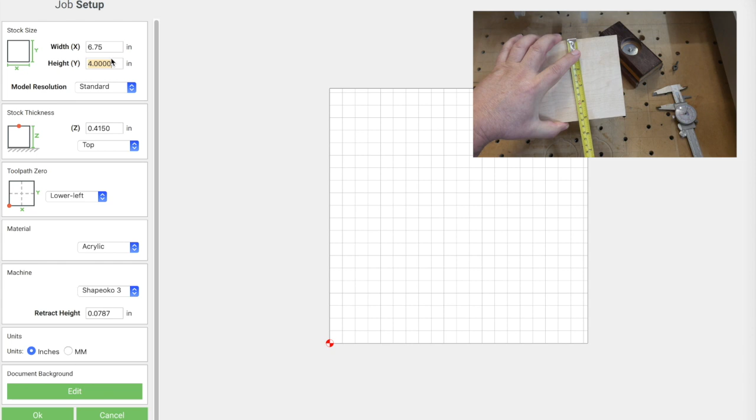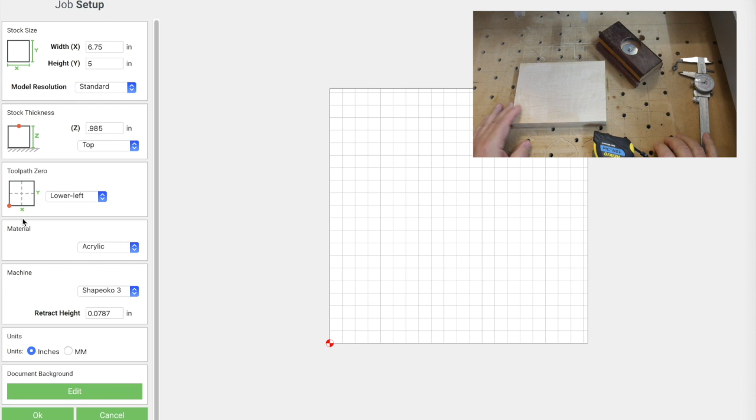Okay, so the first thing we're going to want to do is get a measurement on our stock. That's the first thing we do when we set up any file in Carbide Create. We've got a length of about 6 3/4 and a width of about 5 inches. And when it comes to measuring the thickness of the wood, I always use a set of dial calipers, just so much better for accuracy. And the dial calipers say 0.985. So that's what we're going to set the thickness of our lumber at, and we're going to start our positioning from this bottom left corner. So once we've got all that set up, we can move on to designing.

Okay, and starting with our design, let's take a look at this again. We're going to do the bottom piece first. And we've got here two rectangles, the one going around the outside and then another one going on the inside that will create these two rails for us.

Now, we've decided that our outside is going to be 2 by 3 inches. And I got this by trying a couple of test blocks and just sort of seeing how things felt in my hands. But that gives me a really good size for this. So our outside will be a rectangle 2 inches by 3 inches.

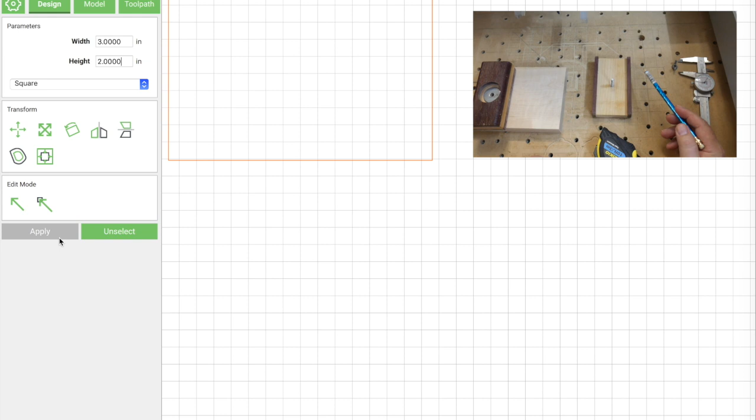Now for this inside piece, I want each one of these rails to be about 1/4 inch thick, right? So to do that, 1/4 inch, that's a 1/2 inch total. I'm going to make this inside piece 1.5 by 3.

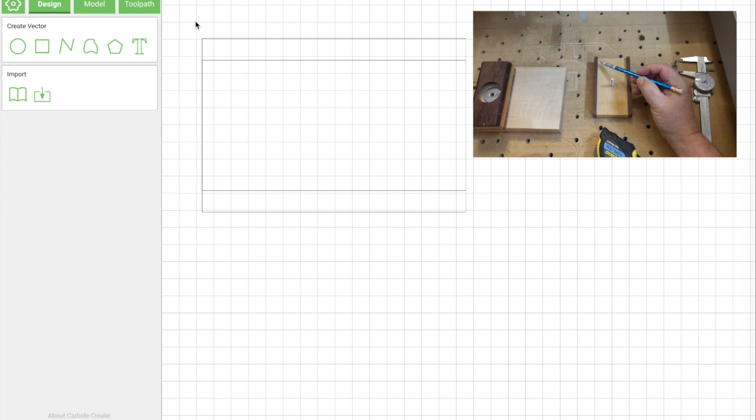Now, I'm actually going to go ahead and extend that a bit, because otherwise when the bit gets into this corner here doing the pocket, it's going to curve in and we're going to end up with like a little nubbin here. So I'm going to extend that out a little further so that the bit cuts completely at a nice parallel angle here and we don't have to carve anything extra out. So I'm going to extend this out on both sides, and that way our bit will cut completely. And that will be for our pocket pass.

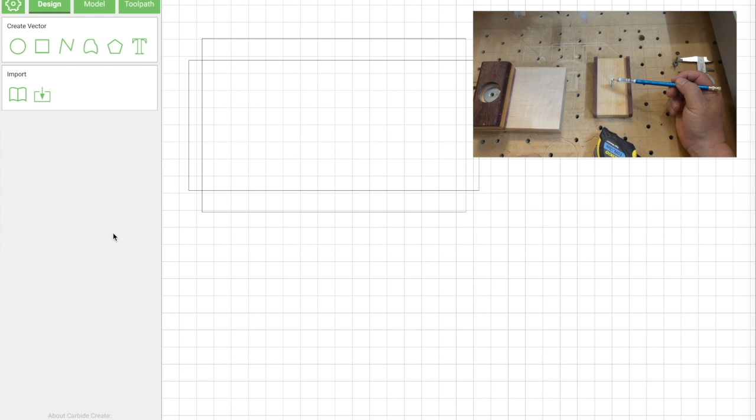Now the last thing we need to cut is a hole for this guy. And I'm going to be using a 1/4 inch bit, and I'm going to make this hole a little bit larger than 1/4 inch. That way we can use the 1/4 inch bit and the system won't complain about it. If you try and cut exactly a 1/4 inch hole with a 1/4 inch bit, it will not let you. It assumes that that is too small, so you need to make it just slightly bigger in order to drill a hole straight down that's approximately 1/4 inch.

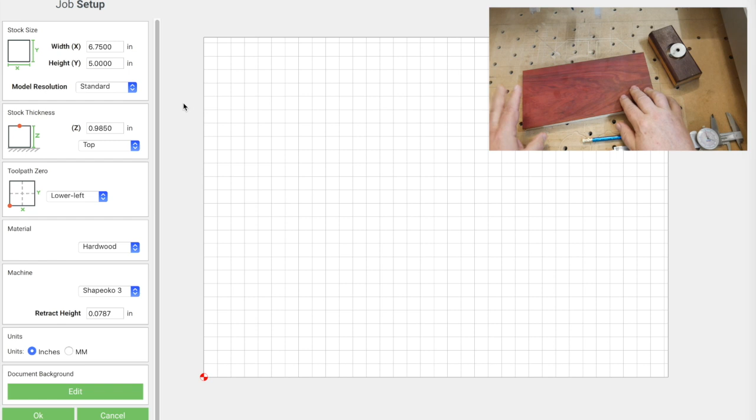Okay, now the same way we did for our bottom board, this is our top board that I've made a composite out of maple and bloodwood that we're going to use to create our top piece like this. So I need to get measurements for this, and we'll set up our file in Carbide Create. And this one is 10 inches by about 4 3/4. And again, use the dial calipers for thickness. Okay, that looks like 0.68.

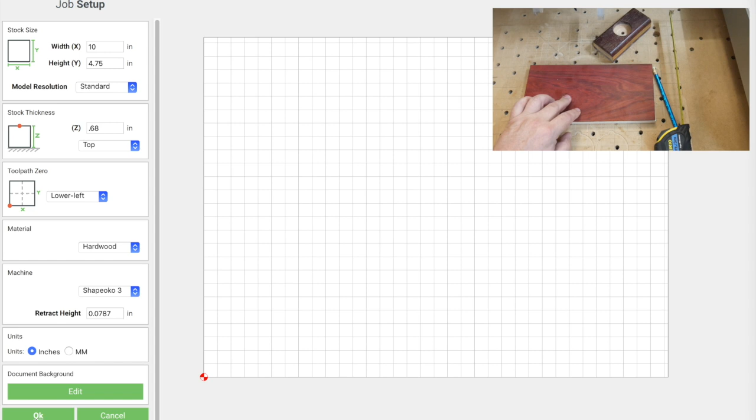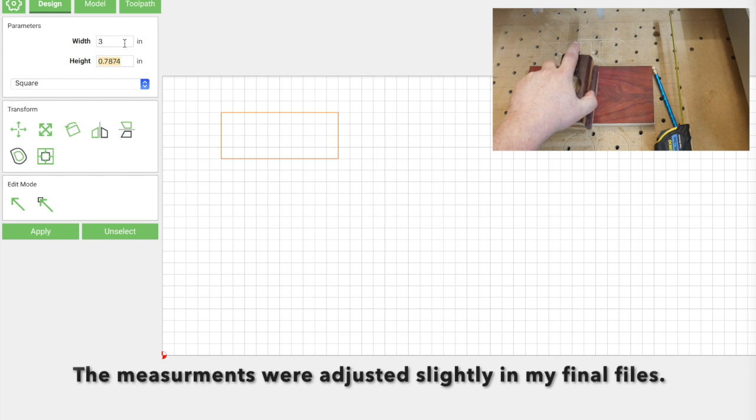Okay, so now that we've got our sizing on this piece and we've set everything up in Carbide Create, we need to create the shapes that we need for this top piece. Now we have a rectangle going around the side, and we know that that rectangle needs to fit into our bottom piece. So I'm going to make that rectangle roughly the same size, but it's going to be a little bit narrower along this length, so that piece will sit down inside and the sandpaper will then wrap around and have a place to go underneath that. So that'll be just a hair narrower than that.

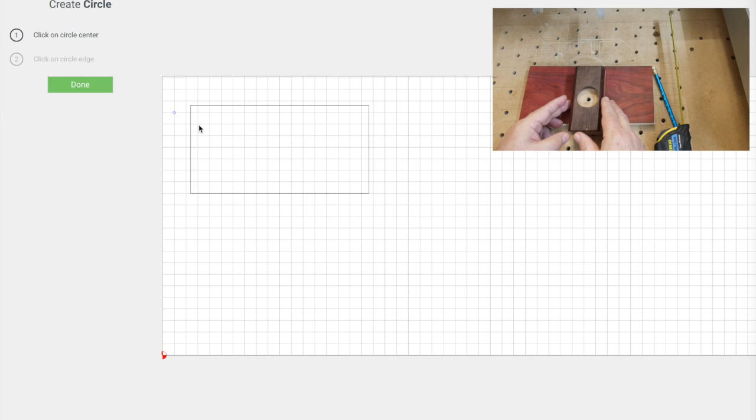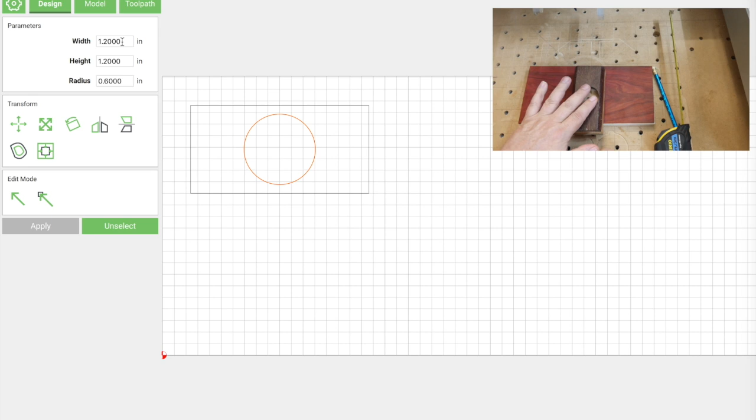So now that I've got this rectangle piece, I need to create myself a pocket here. This pocket is what allows the wing nut to sit down in there and not hit your hand when you're using the sanding block. So we create that circle here, and one thing to note on the depth for this, I go ahead and just measure the wing nut itself, and the wing nut itself is about a 1/2 inch, so I know that this pocket needs to go down a 1/2 inch in order for that wing nut to clear and not hurt your hand.

So the last thing that has to be done is we cut a hole here in the center, and that's where our bolt is going to come up in the middle. And those two pieces have to line up, which is easily done just by centering everything on the rectangles.

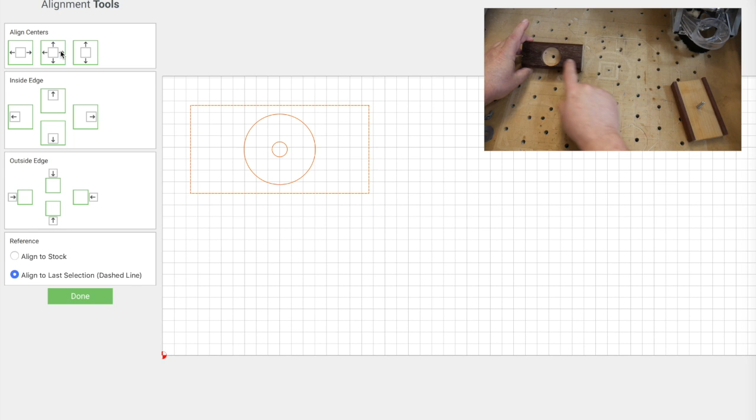Okay, so now that we've got our basic design down and everything is lined up on this rectangle, so we know everything's going to be centered up and it fits really nicely on this piece, I'm going to go ahead and duplicate this 4 times, and that'll make sure that it goes with our grain the way we want it to.

Now, the next thing I need to do is I'm going to put the text on the block, and that will come in right across here. I want to go ahead and put it sideways here on the block. So I'm going to make the text, and then I'm going to turn it 90 degrees so that it fits on my block right here.

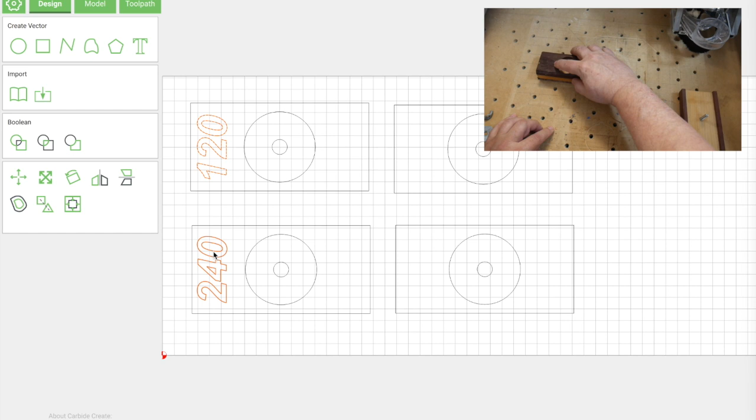So the first one we want to set up is our V-carve for the numbers, right? We're going to use a standard 90-degree bit and just go with the standard V-carve settings. We don't need to change any of that.

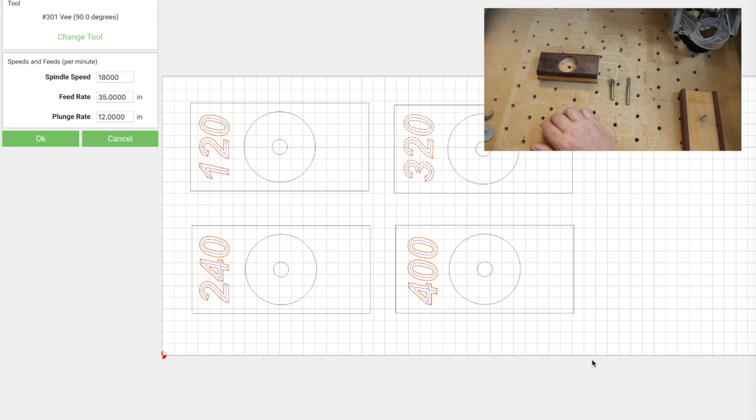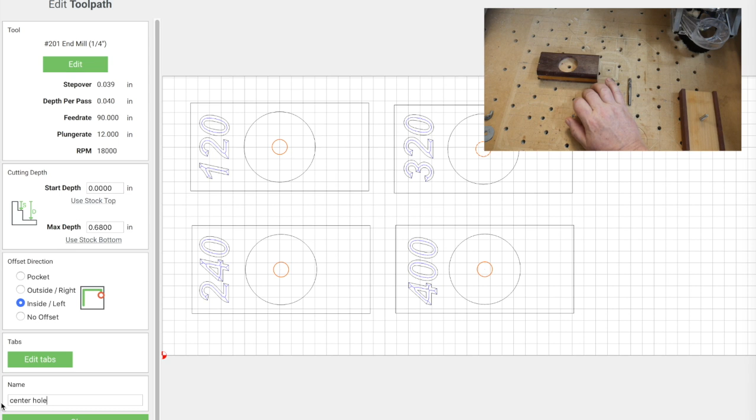And then we're going to use our 1/4 inch bit to cut the rest of this. The first thing I'm going to do is set the hole for our center. And once I've done that, I'm going to go ahead and create a new toolpath group. This just makes it much easier to switch things on and off when you're trying to save the G code, and you'll see that in just a minute.

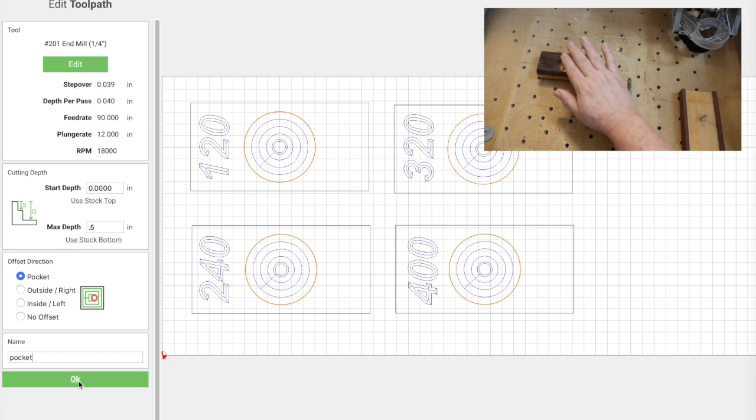So I'm going to call this one 1/4 inch bit, and I'm going to drag that toolpath that we created for our hole down into that group. So next we're going to go ahead and do the pocket here for our wing nut. And if you remember, our wing nut was about 1/4 inch, so we want to make this at least 1/4 inch deep so that it doesn't hit our hands when we're putting our hand down on the block.

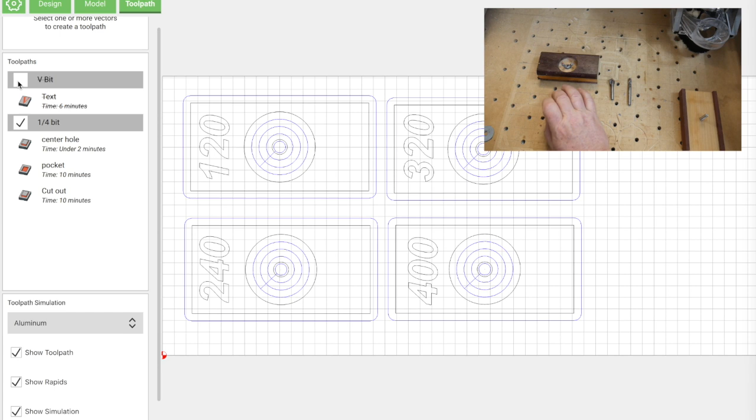And then finally we'll go ahead and do the cutout for this piece. Now, since I'm using the blue tape method, I don't need to set tabs on this, but if you're using another clamping method, you will want to do tabs on it. So let's do that. Then we're going to save our 2 files. We'll go ahead and turn off the V-bit path and save our 1/4 inch. And then we're going to switch off the 1/4 inch and we're going to save our V-bit path. Now we're ready to cut.

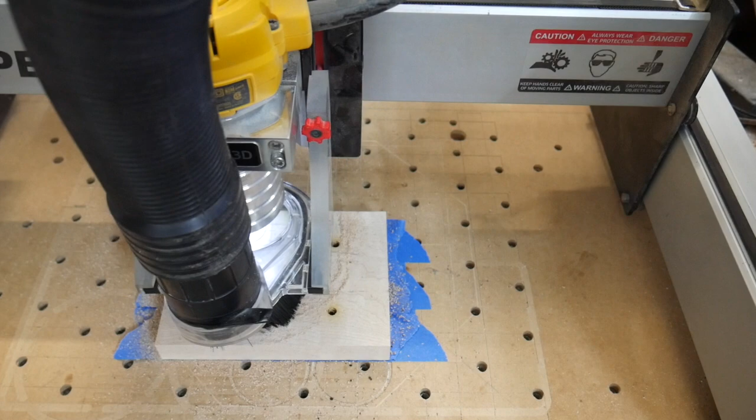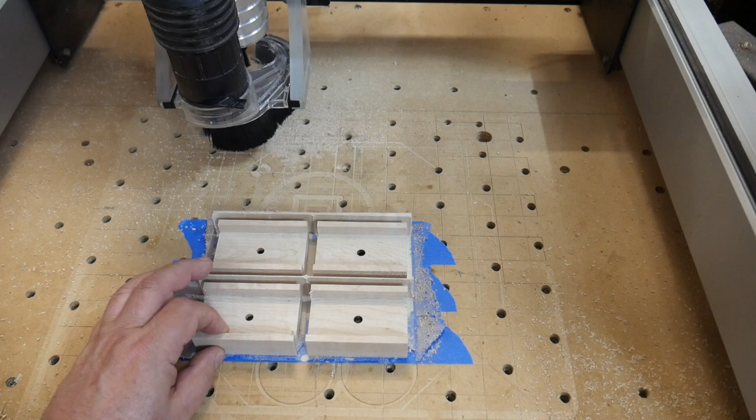Okay, so we've got our little bottom blocks here. I should be able to prop one of these up. Cool. Okay, do a little bit of cleanup on that. Sides look good. Hole did not quite go all the way through, but I'm going to go ahead and drill that out. I need to get that all the way through. Not a problem, not a big deal.

Okay, for our top we need to do 2 passes, because remember we're going to do the V-bit here and we're going to V-carve all our numbers into our block, and then we're going to replace this with the 1/4 inch bit, and then we're going to do the rest of our cutout that we need to do.

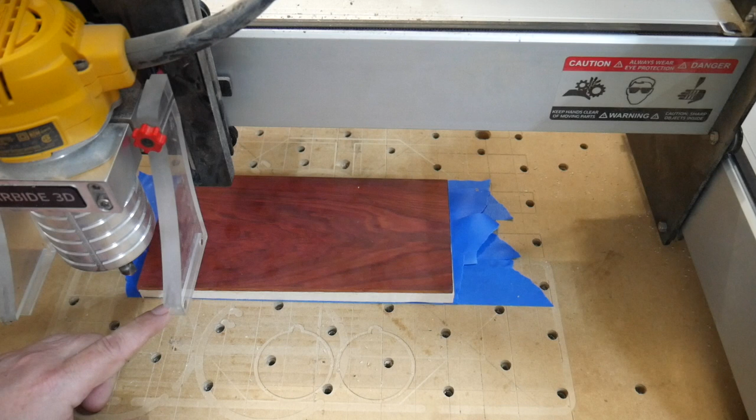So we take our Z measurement here, we get everything right down in the corner like we like it, and then once we change the bit we have to do it again. So let's go ahead and let this start cutting with the V-bit. I'm going to leave the dust collection off for this part so you can get a look at what's going on underneath.

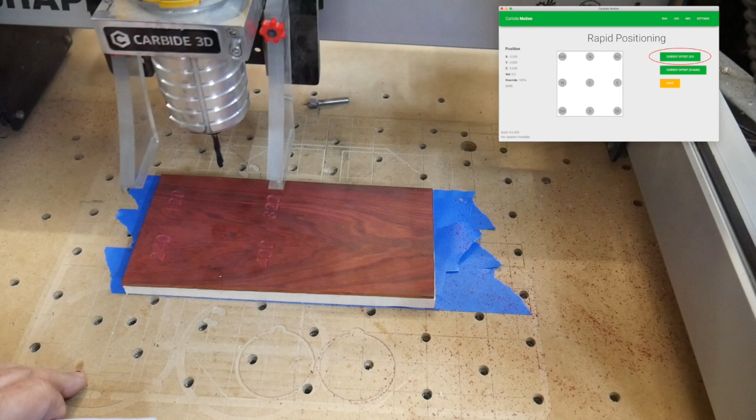Okay, so when it comes time to reset our Z, the easiest thing to do is to use the rapid position settings in Carbide Motion and go to the current offset, X and Y, and then just reset the Z instead of resetting all of them. Let's bring this down a little.

Okay, that looks good, and we'll set our 0. All right, Z is now set to 0. We'll bring this up so I can put the dust collection on, and we'll be ready to go.

Okay, so now we've got our tops. These look nice. One of the things I want you to take note of, when I said calipers are important for accuracy, they really are. If you'll notice on this, when I measured my thickness, I managed to set it to where I cut through the material, but not the blue tape underneath. This really does save you a lot of hassle if you use a set of these, so definitely recommend them.

So I will probably go ahead and round these over on the edges here, just to make them a little more comfortable on the hands, but those look like they're pretty nice. So the last thing we need to do is, on the opposite side of this hole right here, I need to cut a place for the hex head to go so that this piece remains nice and flat. And I'm going to use one of my centering jigs to do that, and I'll show you how those are set up.

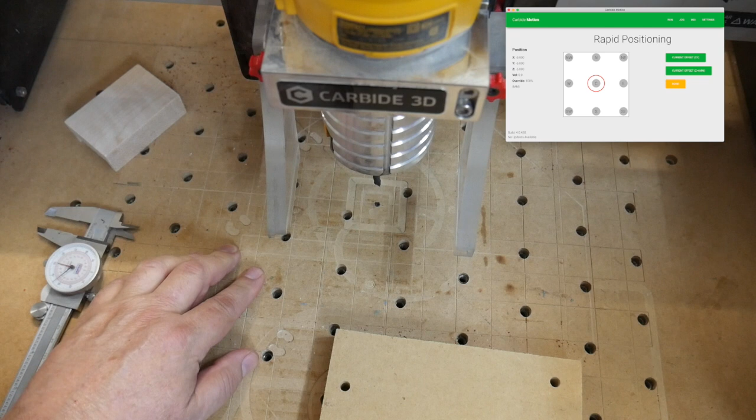Okay, so the centering jigs take advantage of the rapid positioning system in Carbide Motion. And if you notice, there's a black dot here on my board. That is where the Carbide Motion center is for my waste board. Now, what I mean by that is if you go to rapid position and you choose the center piece, that bit will come right over top of that dot. And it's great because I can come back next week, next year, whatever, and that's still going to be the right position.

So here's what that means. Let me move this out of the way. We take a piece of MDF and we bolt it down to where that dot is approximately in the center of the MDF. The next thing we do is we set up a file in Carbide Create where, instead of selecting this bottom corner as our start point, we want the center of the whole design to be the start point. All right? So center to center.

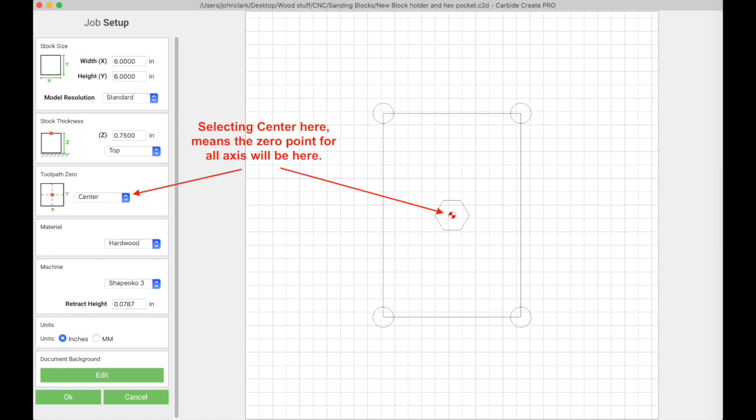And then what we do is we take our original file from the block that we created, and I'm going to just cut a rectangle that's exactly the size of this. That way I can slot this down in the center, and I know that the center of that block is going to be the center of the Shapeoko and of this piece. So everything should line up exactly. And I'll show you what I mean, because I've already got one of these cut out. Like I said, I can come back a year from now, and center is still going to be center, unless I do something really dumb.

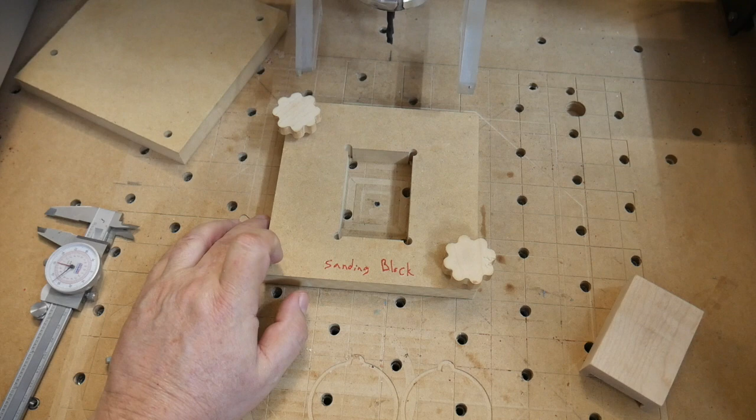So I can just bolt this one down. Okay, get in there. There we go. Okay, cool. So now, when I hit my rapid position center, I am directly over the center of that opening, and I should be able to cut the recess for the bolt head. And it should be exactly the same in every single block. So let's set that up and give that a go.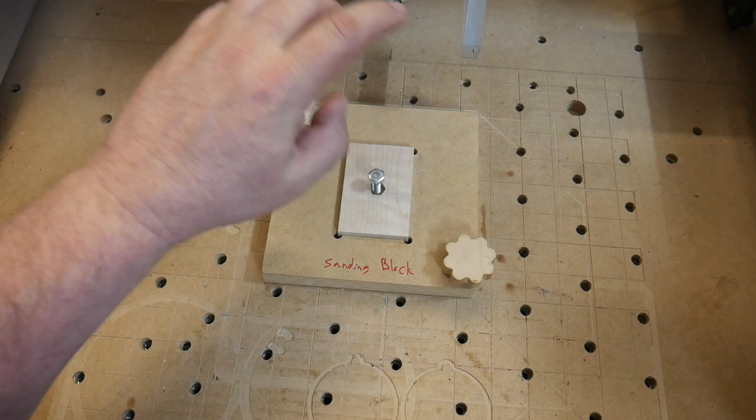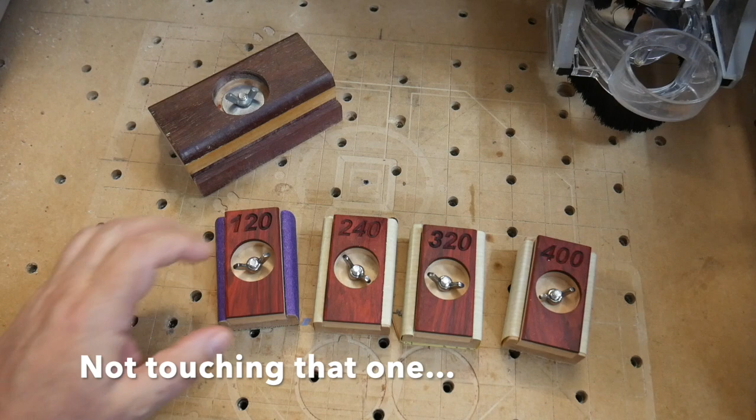And it's just a little smaller than our bolt, which is fine because we're going to push that in there. And once we put some contact cement on it, we'll go ahead and push that in, and it should line up just fine. Okay, so here's our original block, and here are our new ones. Okay. And you notice that the way these come together, I got a good clearance so I don't get that nut grinding into my hand. That's not good.

So now if we undo one of these, you can see we can just pull our top off here, and this is where we wrap our sandpaper around, and when that top comes in, it snugs that sandpaper up nicely, so it always has a nice tight fit, and you've got good room for sanding in there. I also put a strip of leather here on the bottom. You can use leather or cork. Either one works good. It just gives you some good padding for that sandpaper underneath, so that when you're sanding things, you get a good firm contact with all the surfaces.

And just put that back on. Tighten the nut again. And you're good to go. And it's nice because, like I said, I can just pick these up and go through my series, and that way I know that each time I'm getting a bit better finish on it with each pass.

So while shop projects like this might not seem as cool as doing stuff like boxes, I find they're a really nice opportunity to take some chances and make something that's both functional and attractive. It's nice because this is going to be something you pick up every day and use, and it's good to remind yourself about how creative you are and the kinds of things that you can accomplish. And I find that these do that very nicely on a daily basis for me.